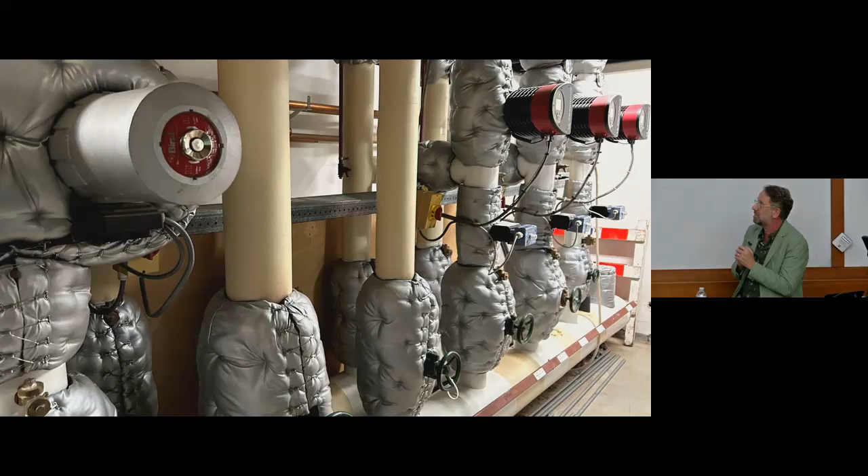So I bring up that contrast just briefly in what seems like perhaps a kind of self-defeating way, but embodied energy is the bulk of the carbon emitted through the building industry today. And we can have a discussion. I'd be happy to get into details after the lecture about how we can imagine shifts in the embodied content. I'm mostly going to talk about operational energy, right?

And so one of the themes here is that in principle, one could decarbonize the electricity grid so that we could run the lights and the escalators and the air conditioning machines off decarbonized energy. I mean, soon maybe, right? So one of the arguments here is that we really should save in the embodied energy because we can save in the operational energy later. Does everybody get that? Yeah? So that's kind of where we should focus our time, right?

So I'm saying that, but I'm also not doing that. I'm focusing my time elsewhere, in part because I don't really think the grid will be decarbonized, but I just want to bring that whole discussion out into the open as a way to get us in the zone of thinking about energy systems and buildings and how they operate, right?

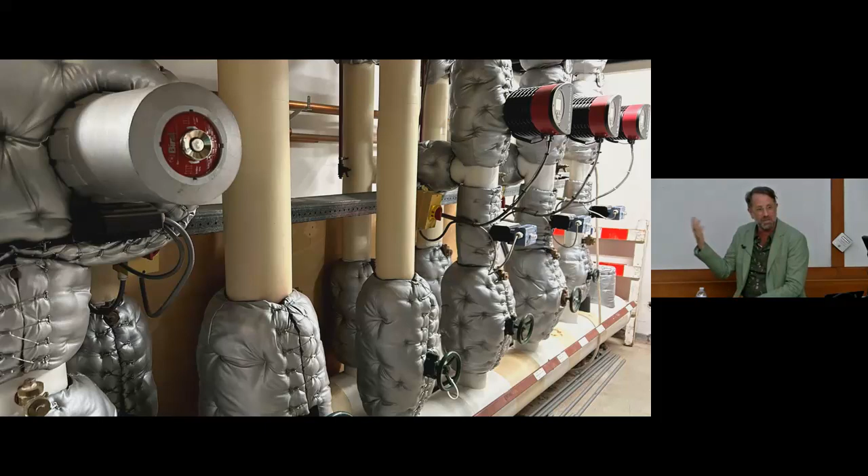What we're seeing here is a sort of typical heating and cooling system, let's say. This one happens to be at the Nieuwe Instituut in Rotterdam in the Netherlands. We all know that these kind of machines are hidden behind the walls or in the basements or on the rooftops, right? We all know that these internal systems are there to allow us to breathe and to allow us to feel comfortable in this space.

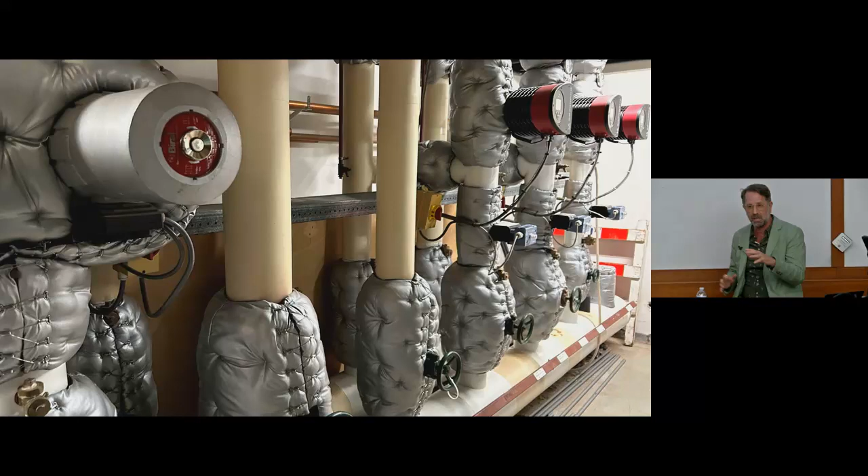Is everybody feeling relatively comfortable? Yeah? Okay. I'm wearing the universal suit, so I'm a little hot. But if people want to make themselves uncomfortable for a second, lean, and so there you go. Just see how, there you go, that's a good one. Just see how long you can hold it until you're like, this is uncomfortable. We're just going to leave you there.

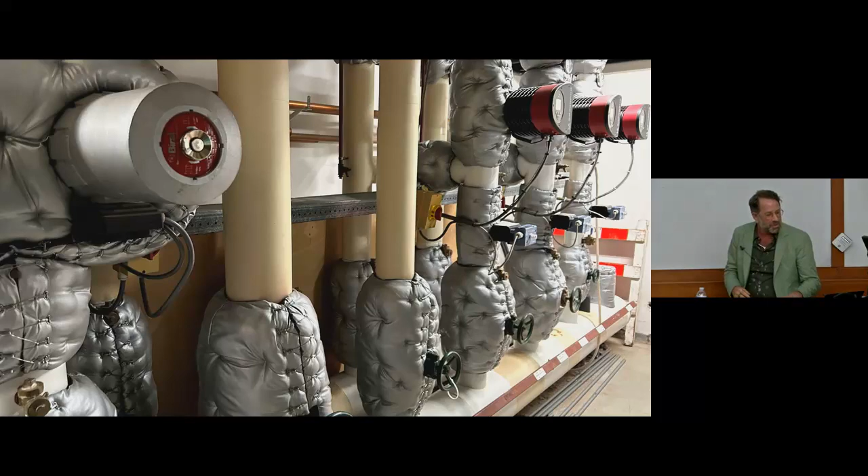There has always been comfort in the world, reckless comfort, we could say. Comfort based on someone else's continuous labor, right? So there's immediately, you can stop now if you want. Sorry, I was trying to feel bad for the guy.

There's immediately an equity piece here, right? It's not quite a zero-sum game, but we are comfortable by virtue of the fuel running through the system that we're effectively inhabiting. That has costs, right? And those costs tend to be paid by someone else. And we'll get into that in a second. But this question of comfort being based on someone else's continuous labors, right?

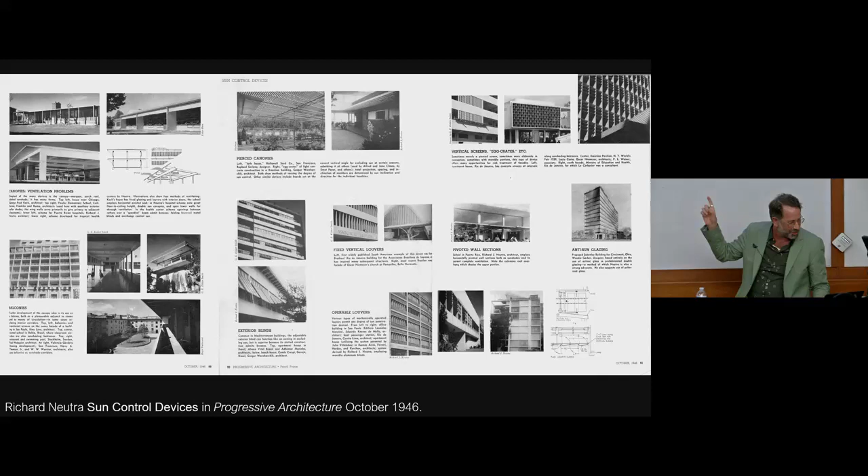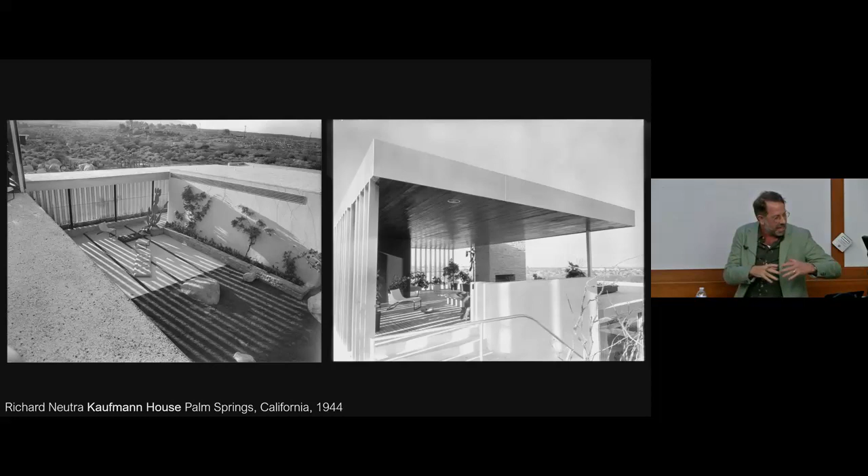So this is Neutra's Kaufmann House in Palm Springs, one of the better known. Again, thinking about comfort and equity, and this kind of delicacy that he's playing out here of these indoor and outdoor spaces. Here's some schools that Neutra designed, what he referred to as open-air schools, where this entire wall would go up like an old garage door.

And the students could sit outside, expanding the spatial dimensions of the classroom while also adding a significant climatic element, cooling the space off, assuming the day was more or less manageable. Neutra, I'm just playing out this narrative for a second to think about these questions of control and equity, climate control and equity. Neutra was

hired by the American government, at that time the Protectorate of Puerto Rico in the mid-1940s, to design some buildings for this site, some schools and houses and urban centers, designed in a very particular way for a relatively infrastructure-challenged geography. Not a lot of electrical wires, not a lot of utilities spread throughout the island, but a lot of need for comfort, for shelter, for the provision of amenities and services.

So Neutra started to devise this principle of modernism, and we won't get into all the nuances, that was less about a functionalism and more about what he referred to as an operationalism. So how can we operate as architects in such a way as to serve the common good with our interventions, with our designs?

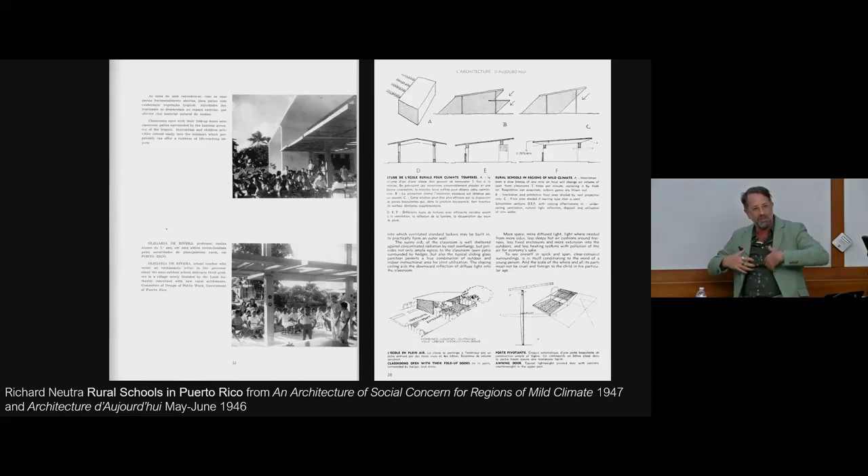One of the things you can see already is that he's looking at not only the angle of the roof, but this capacity for an air pass-through element to allow for ventilation, even the capturing of some of the rainwater, through the way the roof is designed and organized. We see again in these rural schools the capacity for them to open up onto this shared parkway, a ventilated condition that allows the building to not require the HVAC system. So bringing it back to that premise.

So again, it's just one little first taste. We'll get a few more to kind of think about how the architecture that we have come to accustom ourselves to, that we have been conditioned to spaces such as this, and it's kind of a great exemplar space of a room that probably couldn't exist were it not adequately conditioned. There's not a lot of obvious opportunities for natural ventilation.

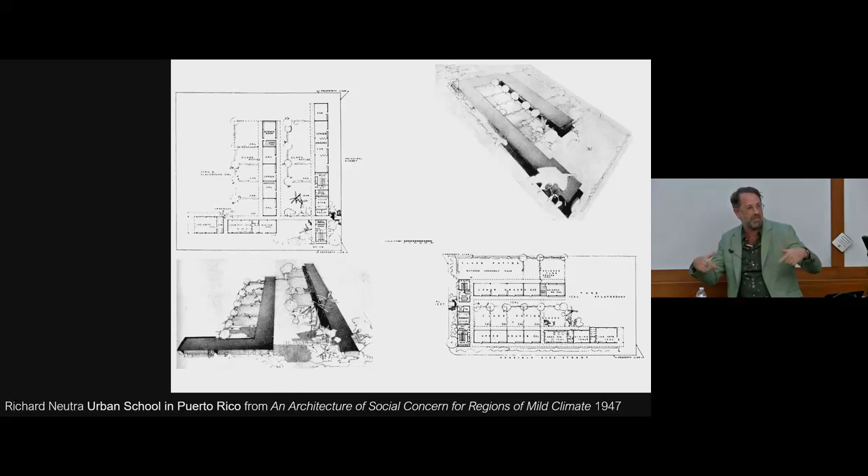We're in effect kind of stuck in here, right, to have this discussion, and we couldn't be here without the HVAC system as a kind of life support system, right? So in that kind of basic sense, we are breathing petroleum, right? We are kind of digesting it through our lungs and often in things that we touch and things that we eat and things that we wear. But we're engaged in this kind of cycle of petroleum extraction, distribution, and sort of dissemination into fuel tanks.

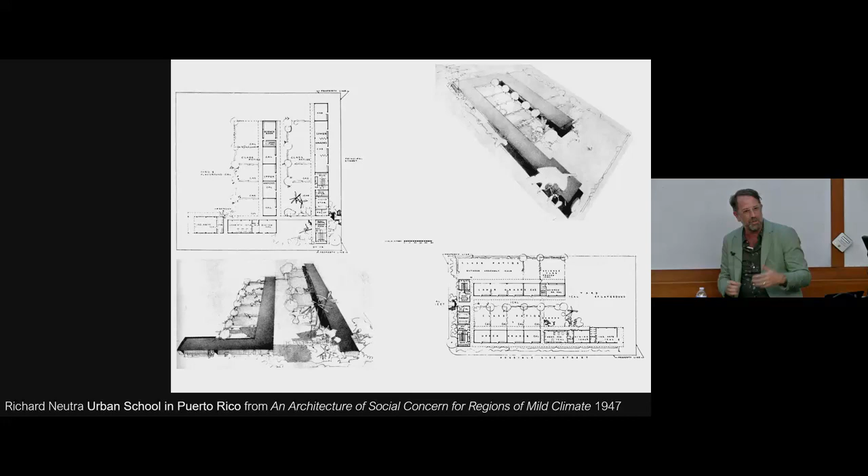I mean, maybe we're even on steam heat here actually. So I might have to change the argument a little bit. But we're reliant upon a system that comes out of a fossil fueled system in order to kind of exist in this space. And I'm just going to show a few slides as I'm talking through some of this.

Part of what I want us to think about is the extent to which, historically, over the period circa 1920 to circa 2020, that's a very optimistic kind of century of petroleum profligacy. And I like to say profligacy because you could do this easier pre-COVID. You kind of spit it out when you say profligacy, right? And we've just sort of spewed oil around the world and lived off it and kind of surfed the waves, right?

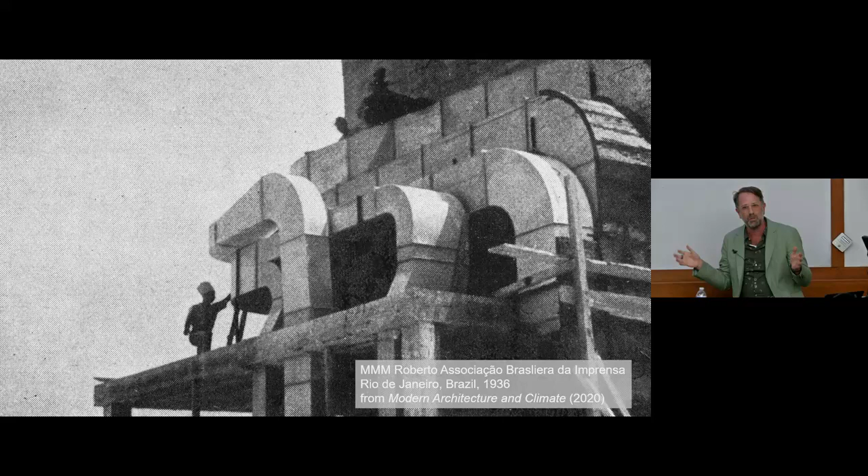This century of fossil fuel profligacy, in effect, can be bracketed off, right? And we can kind of understand what was happening before fossil fuels, or at least at the beginning of it, as a means to kind of think about what happens next. Okay.

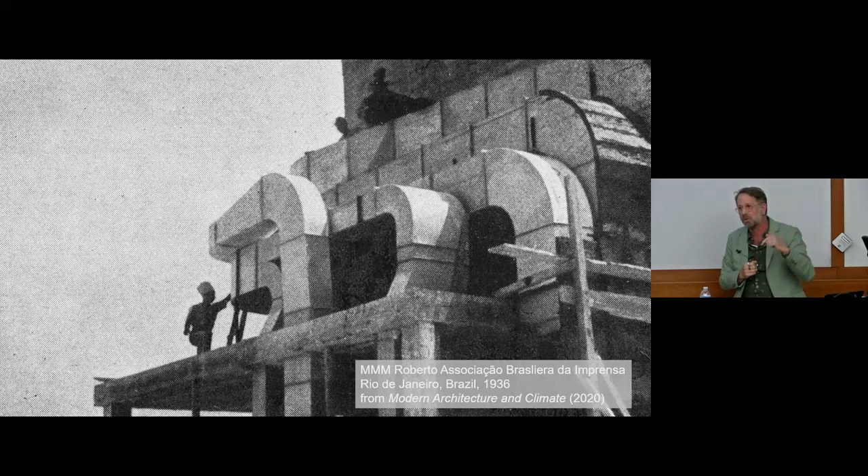I'll add one other little piece before I go on in this kind of hopefully effectively scattered preamble. Neutra's work in Puerto Rico was also really interesting because it was in relationship to a set of economic theories, right, that we would today call degrowth. But at the time were not called, and when I say that, you're supposed to go, degrowth. No, okay. At the time it was referred to as a horizontal economy, right?

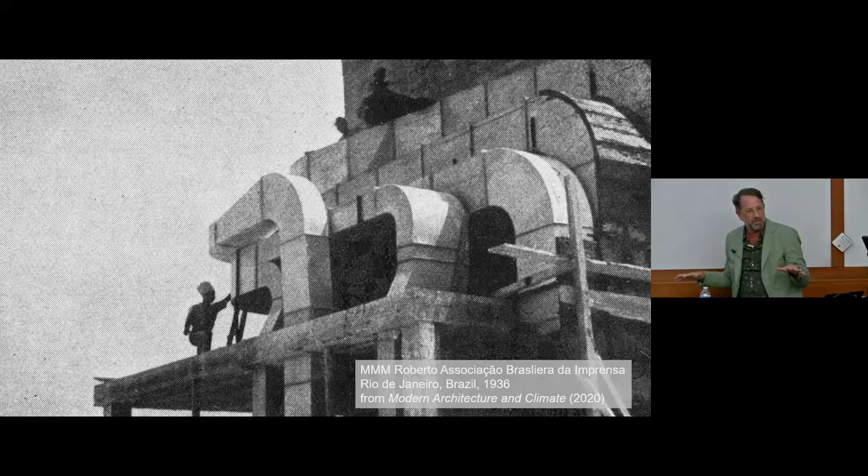Which is to say, why not take an island such as Puerto Rico and, rather than provide a kind of paternalistic relationship to the United States mainland, provide the island with resources and utilities and materials such that it can be in effect self-sustaining, right? Allow for the economic expansion of the island to be distributed across the island rather than kind of going upwards towards mostly urban design consultants from Harvard, right?

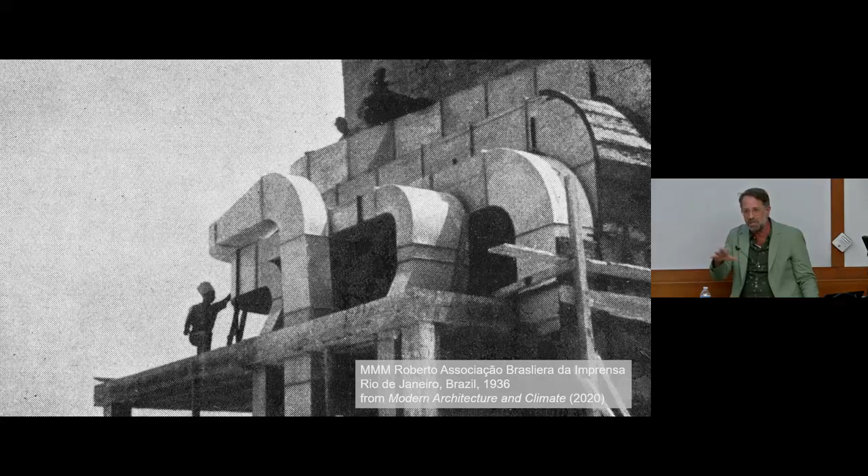How can we sort of reimagine the relationship of that economy so that it has that kind of horizontal reach, right, rather than a vertical sort of going up, right? So it's to say that these kind of architectural interventions were also about a kind of different relationship to the costs and benefits of economic growth, right, and to understanding the relationship between economic growth and the kind of territories which it inhabited and which it often extracts from.

Okay, shifting gears to a sort of part two or kind of 1.5 here, right? Again, still kind of getting us all on board and on the same page, and I certainly welcome questions throughout the discussion. I want to sort of bring us up to speed, if you will, relative to this question of carbon and comfort and buildings as really just a medium to kind of draw fuels out of the soil, right?

Draw fuels out from underground and sort of process them and then emit carbon into the atmosphere. Right? That's in effect what the 20th century has wrought, right? A sort of cultural medium through which we can process fossil fuels. So I want to kind of give us, not super updated, this report is now almost exactly 2 years old, but it says some important things about buildings that help us to sort of get on board.

This is a report from the Intergovernmental Panel on Climate Change, I assume a body known to many here. Hopefully you have read the report. It's a bit annoying to read, but you kind of get the general idea. Maybe you've heard about the COP conferences, et cetera.

This entire report is on the mitigation of climate change, and the two approaches to climate change are adaptation and mitigation, right? Like adjust and expand the wetland so that you can manage the hurricanes. That's adaptation. Mitigation is reduce the amount of carbon we emit so that it doesn't get worse. We're mitigating the problem. We're trying to make it a little bit better. So this report was in many chapters, a couple hundred pages, various forms of mitigation.

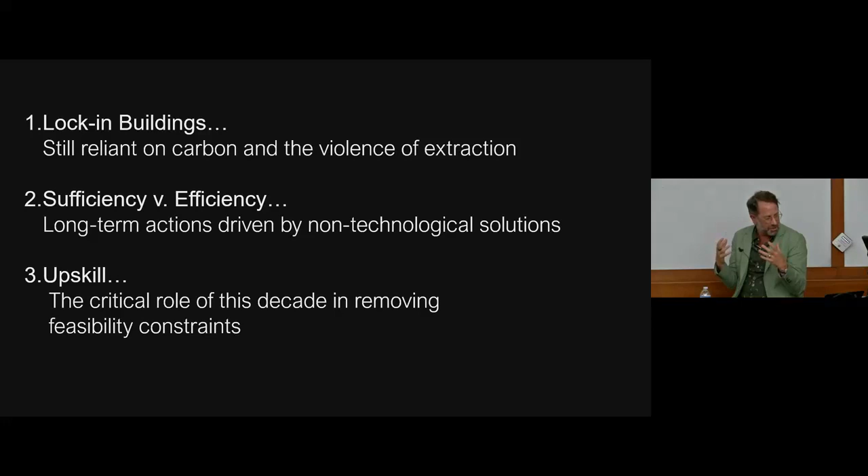We want to look at the details of how architects can be most effectively involved. But this broad question of banging our head against the wall in frustration that we're involved in a professional operation that is damaging to the planet, and we're struggling to find ways out of that.

So what is this locking in, right? It's not just locking in the kind of shell companies that own half of these apartments and the economic inequities across New York City, but the broader sort of global inequities that relate to fossil fuel distribution, and of course the kind of equity of comfort as well.

Okay, second principle, sufficiency versus efficiency. Sustainable architecture, such as we've come to understand it, green architecture, and I'm running late here already, so I have to do this quickly, so you'll forgive me if I tread on anybody's toes. Green architecture, sustainable architecture, has relied on the principle of efficiency, right? We're going to provide exactly the same product. Any building that's green looks more or less exactly the same as the one next to it that was built in 1980. Whatever, it's got a lot of floors. You can use it as an office space. You can use it for your hotel, right? We're providing the same service, but we're doing so with marginally less energy. We're making it a bit more efficient.

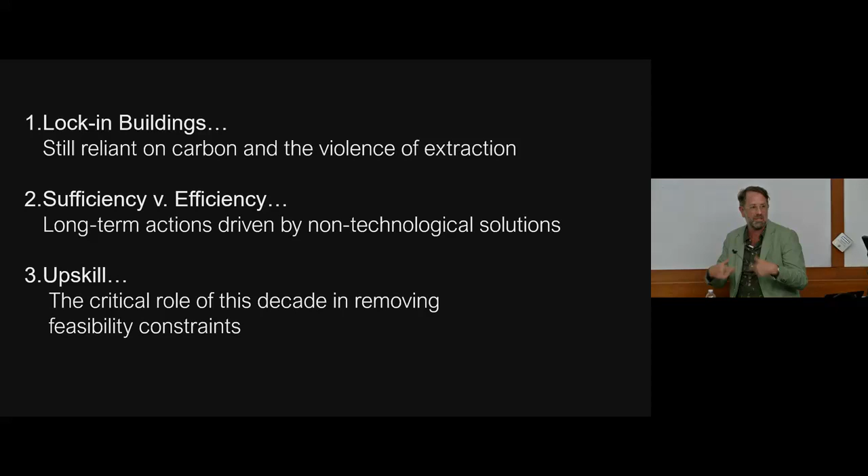So this question of upskilling is really just to suggest that this is the decade, right? This is the period, the time is now, to consider as students and as pedagogues how we change, reimagine the contours of the field according to this transformation that we know is going on, but still aren't quite sure how big it's going to be or how we really get ahead of the game here, right? So part of this is just to stay aware of that flow of knowledge and that transformation of professional tools and capacities, and keep oneself abreast of those changes.

One of the thoughts that came up in my head was looking towards biomimicry, and these structures that can be radically different to structures we know now. Right. To the kind of common programs we're seeing. Yeah, it's a tricky one, right? I think biomimicry has many components to it, and I could imagine a lot of ways, in general terms, of learning from the natural world to understand modes of sufficient construction and modes of habitation.

I think the danger bell that goes off in my mind is that biomimicry, as some of you may know, is often about structural efficiency, right, which can be great, but still the efficiency is in there, right? And a lot of times this question of efficiency versus sufficiency comes up. Should we take down this building and put up a fancy LEED 5-star tower? Or should we let the building survive as it is, but adjust it and retrofit it and give it some better systems and make it work a bit differently, right?

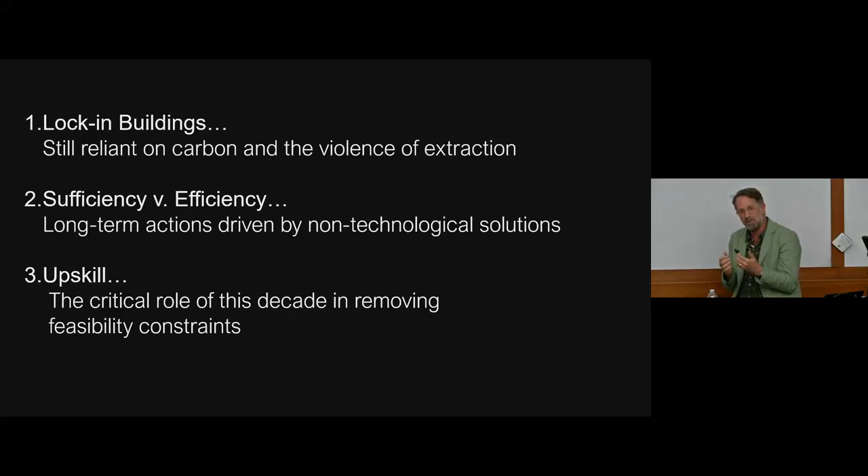The efficient 5-star LEED tower is still going to require so much embodied energy that if you bring that aspect into your analysis, generally speaking, retrofit, I'm being far too schematic, right? But in that ideal scenario, retrofit would win out on carbon terms. So I think you'd always want to be wondering, with this biomimetic approach, what's the difference between doing this and dealing with the existing building and maybe even using these same skills and tools and design approaches to reimagine that building, right? So, speaking very generally.

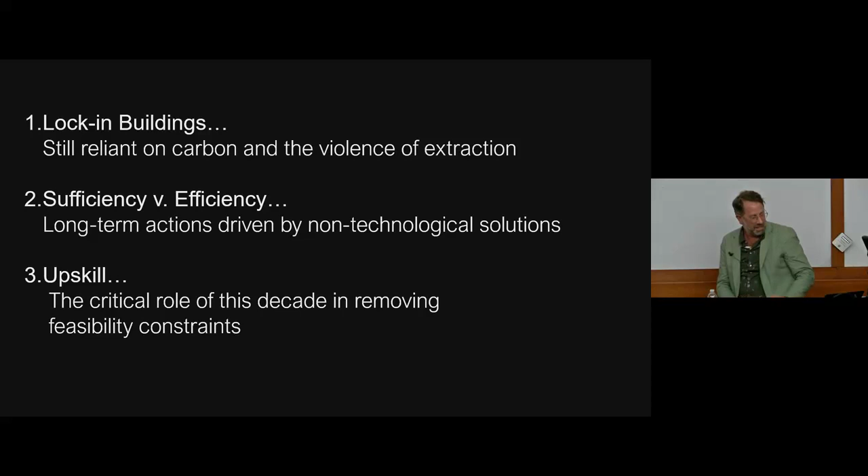Okay, so I think we're at part 3 now. This is a comparative analysis of these two buildings to help us get a sense of this general premise that I put on the table of this bracketed century of fossil fuel profligacy, of petroleum profligacy, and how by looking at its early days, we can begin to imagine its end times as well.

Not our end times, right? It's not the end of us, it's just the end of fossil fuels. That's an important thing to keep in mind, that we're not really talking about the end of the world. We're talking about the beginning of a different world. We're talking about a transformation of the way that we relate to our natural environment and the Earth systems that we inhabit. People will suffer, right?

Millions and millions of people will suffer, but it's not an apocalyptic event in the classic sense. So, sorry, just to jump back from that, I don't know how these things come out. To look at these two buildings for a second.

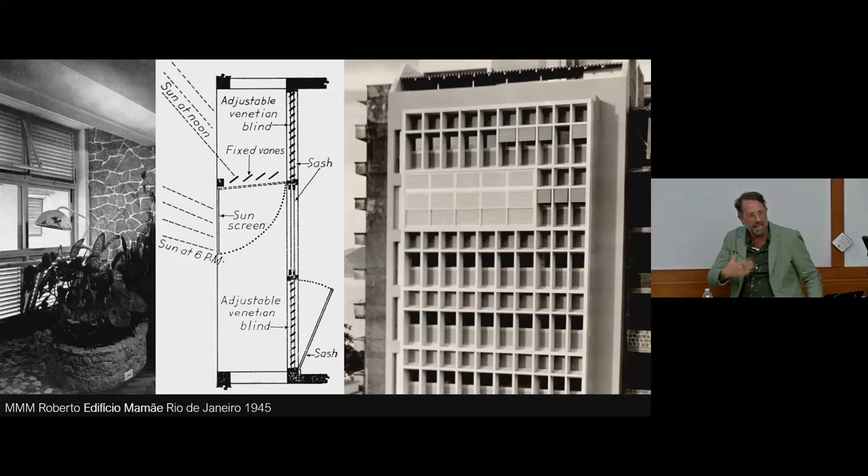There's none of this turning dials, or pressing screens, or using our phone or watches even. There's a much more physically engaged, embodied system. I'm not going to get too much into that, but there's a sense that your body is affected by the climate, and it's also the mechanism by which you can adjust or adapt the climate. In here, in a very simple way, this kind of promotional shot, right?

And it's also interesting to note that the architects would sort of take a photograph of themselves for magazines, moving this shading system around, right? This was their kind of calling card. This was how they got to be known. I just love this one.

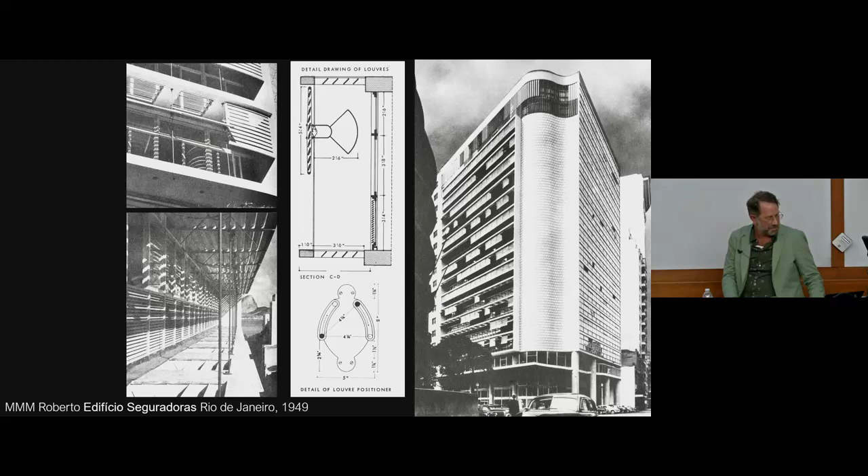So many different ways, again, of moving the shades and different operating systems that can help you to adjust the climate, adjust the light on different terms as the day goes on. Lots of different, kind of explosion of interest and creativity around shading systems in Brazil in the 40s and 50s. A real moment where a lot of interesting things happened, right? A lot of different mechanisms were tried out, experiments were made. Most of these, we should note, were in asbestos, right? So, oops, right? But nonetheless, a lot of great ideas being played out.

And much of that was true in a very complicated way. But it's nonetheless to say that this premise of a shaded interior was also part of this sense of a new world, a new kind of modernity that was being entered into. Okay.

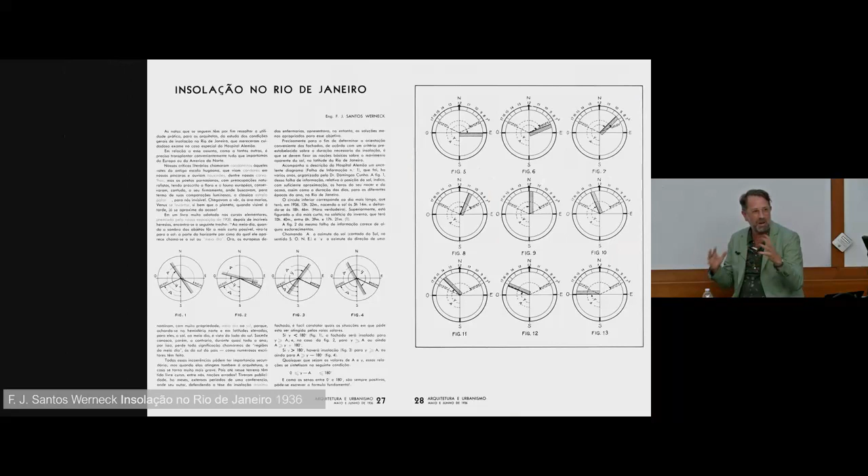And I'll get to this slide in a second, but I don't know if any of you have been following it very closely, but the geologists just decided that we are not in the Anthropocene, right? Is this on your radar? So I'm assuming the Anthropocene is a concept that's on your radar, right? The age of human transformation of the world. It was a complicated decision as to why they decided we are not in the Anthropocene. But the main point, at least the one I'm going to focus on, was that it's not all of humanity.

Right, the burning of fossil fuels and the transformation of the atmosphere, and the geologists are worried about the sedimentary layer, and how basically the carbon that we pollute into the air will eventually become sediment, and over millions of years, I suppose, will be visible in the strata. Some time in the future, when a rock face falls off because of erosion, you'll be able to see the layers that change because of the use of carbon. The geologists were clear that was in fact going to happen, but it's not anthropogenic in the sense of a species condition, right? Some people are doing it and some are not.

And we, if I can be so bold as to put us in the collective of those in the global north that have been comfortable with, accustomed to using fossil fuels as if there were just plenty and we didn't have to worry about it, right? Maybe slightly adjusted over the past few decades, but generally speaking. So it's in part to say that when we're talking about this premise of comfort, we're talking about the calculations and estimations for a very specific swath of the global population, right?

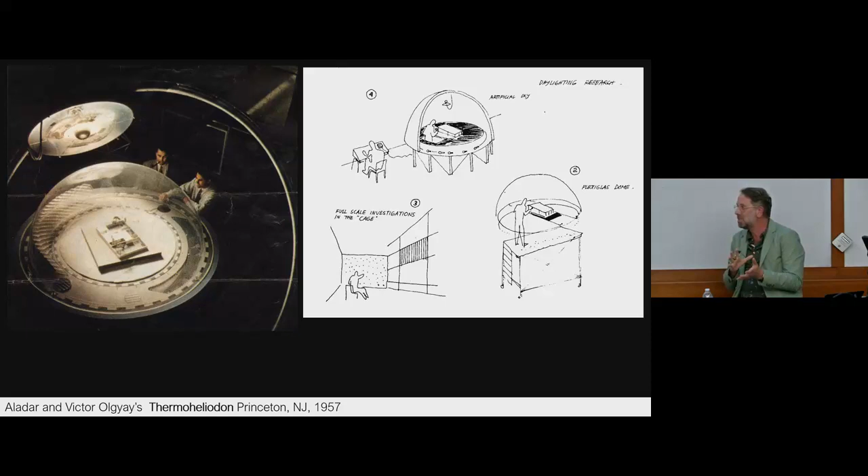Well, the history of air conditioning more specifically really begins in 1911, Yale University, where the Carrier company, which became Carrier Air Conditioners, performed a bunch of tests on 18-year-old Yale male undergrads without their shirts on, right? Sounds kind of fun.

Again, I'm not going to get too far into these kind of histories, but what we're looking at in these past two slides is the kind of moment when theories around climate and comfort began to be theorized and sort of scientificated, if you'll forgive the term, in architecture, and started to enter into the design discussion a bit more directly, kind of how do you feel in your room, in your space that you're creating. And so this concept of the comfort zone, initially developed by these architects, Olgyay and Olgyay, and then taken really quite aggressively by ASHRAE, the American Society of Heating, Refrigerating, and Air-Conditioning Engineers, that has set comfort standards ever since.

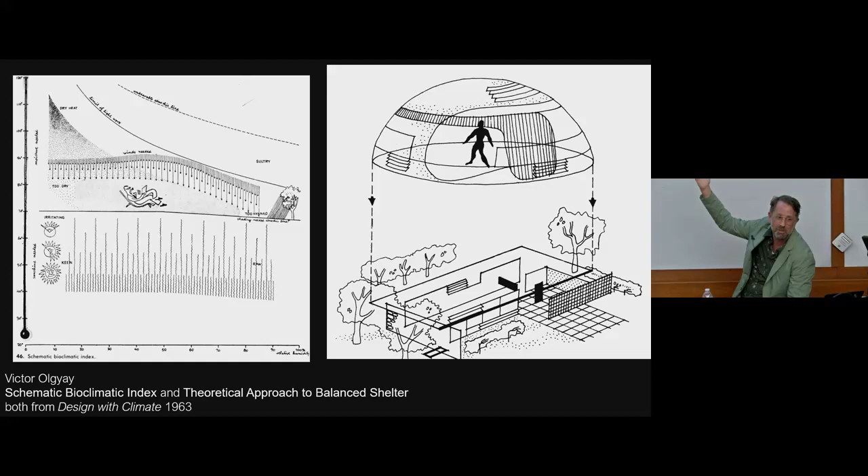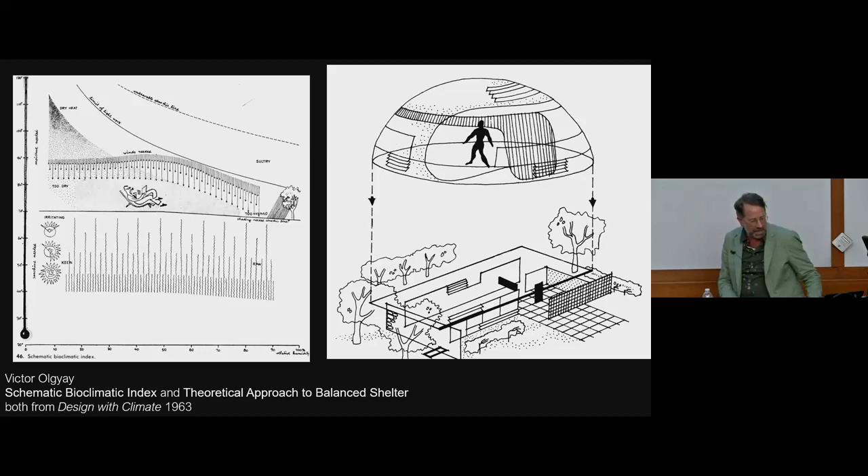So part of what we want to keep in mind is that this sort of premise of the we is really about, in effect, a premise of climate and carbon reparations, right? That if I'm suggesting, as I suggested at the beginning, that we all need to learn to be less comfortable, I'm talking about those of us who have, let's just say, the privilege to be at a university. And I don't want to make any assumptions about other aspects of your life, but I know that about you. So at least during your time in school, you have access to air conditioning.

You have some relationship to the kind of stable atmospheric interior condition that we're accustomed to that optimizes our labor, that allows us to be healthy, that generally speaking is pretty good air quality, et cetera, right? We have this capacity to be comfortable, and there's others that might be down the street or around the globe that are suffering in these same conditions, right? And we can say this very explicitly.

It's a bit too spread out here to maybe feel it sensibly, but we had that building in Hong Kong up a minute ago. Air conditioning doesn't actually cool the air, it just moves the heat, right? I'm sure many of you know this. So as you displace air outside, in most cases that waste heat goes up high, above the building. In some cases it does not. One of the legacies of 60s and 70s modernism in Hong Kong is a lot of the waste heat goes onto the street in an already very hot and humid environment, right?

So there are days when there's heat alerts that are not because of the sensible heat, the temperature climatology, but because of the intensity of waste heat by virtue of the high running of the air conditioners, combined with the heat and humidity, et cetera. So it's to say, back to Neutra's notion, that every time we are feeling comfortable, someone is feeling less comfortable, right?

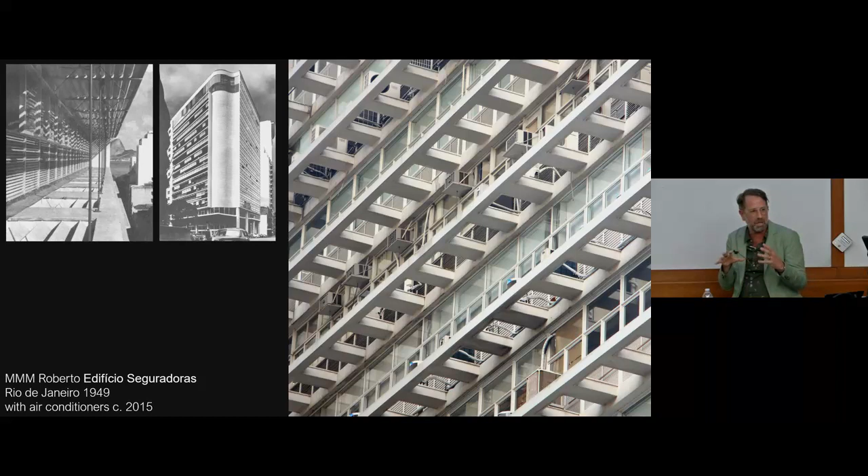It's important to note that the temperature differential, the relative thermal comfort that these shading systems provided, is nothing compared to air conditioning. The power of fossil fuels overwhelms the capacity for shading to have an impact on the interior. There's really no contest.

And part of what's at stake is that you might often hear that we're never going to have enough renewable energy to meet our current fossil fuel use. And that's absolutely true. We will never have enough renewable energy capacity to use the same amount of energy that we're using today by virtue of fossil fuels. So we'll be both increasing the amount of renewable energy available and also reducing our demand. This is back to the sufficiency principle.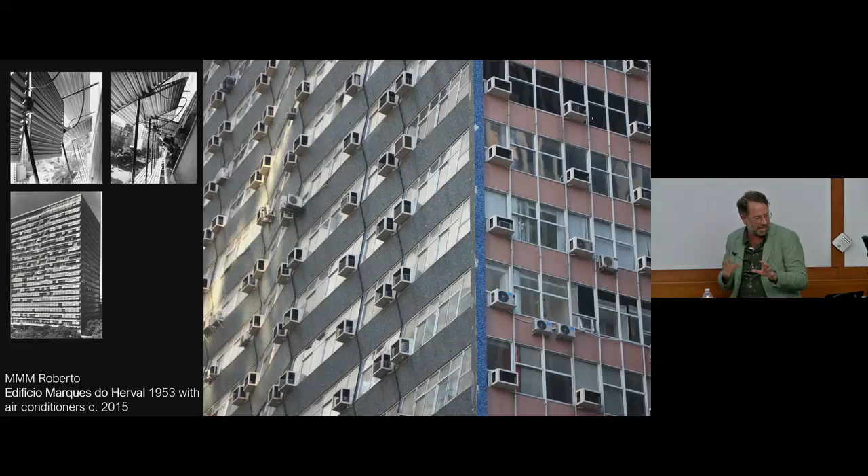So part of what I think these last slides help us to understand is that at stake in designing a building is what I like to think of as a set of thermal practices. There's the thermal practices of the architect, all of us, and our capacity to be agents of decarbonization that set up a system that might integrate the user in a certain way. I'll just jump to this slide since I did the little dance bit on here. A set of interventions that allow for somebody to use the space in a specific way. So it's both the practice of design and the practice of occupation that need to get brought into account in order to understand that nexus.

Practices of occupation or practices of inhabitation, as I've been calling them, really are the same thing as comfort. So what I want to leave you with, as a potential denouement or at least an opening for questions, is how we recognize that comfort is not a universal state, an endless condition of thermal pleasure that we want to open the door and inhabit at all times. But it's rather a set of practices, a set of interactions, a set of ways of being within a space that we can change, alter, disrupt, and reimagine as we move forward. I think I'll stop there. I've got other things here, but yeah, please, go ahead.

How, as an architect or a designer, can you create this kind of uncomfortable... Right. Well, kind of any means necessary. I think there's two answers. One is make sure the person using the space knows that they're using less carbon, have a little thing on the wall, or their watch beeps or whatever, make it really almost a performance of using less carbon, because that trains us to be excited by that. The other version is, completely hide it. Maybe you won't know the difference.

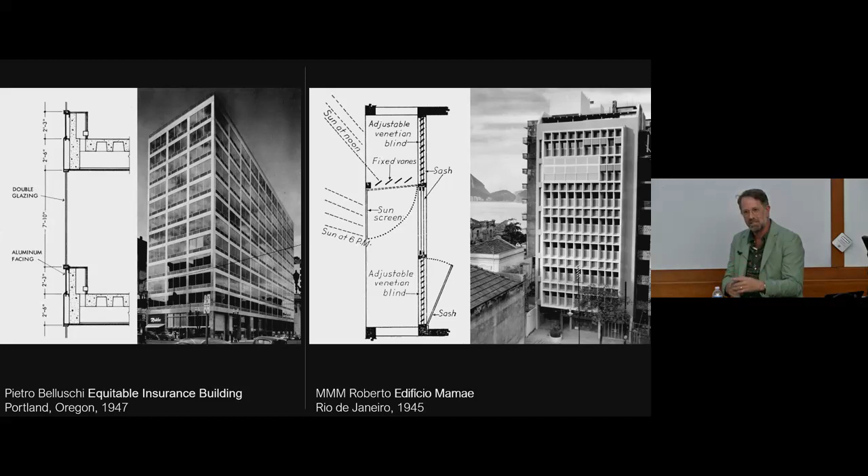So this becomes, again, a sort of activist advocacy political set of discussions that says, we want to encourage sufficiency, but we want to minimize the taking away of rights in the process. And a lot of the people that study this stuff suggest, and this is a frequent framework, that it'll happen when it has to. That we'll live in smaller quarters and in closer context and in a different sort of community when we're forced to, rather than when we select to and opt to. And so part of that sufficiency side of the equation starts to be about enacting desires that have these future people in mind, perhaps even more than the contemporary people, which is a difficult externality to bring into our decision-making process.

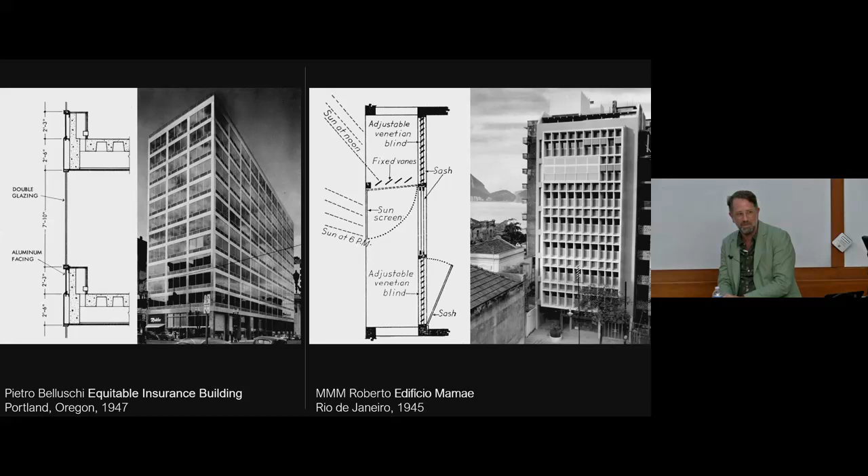How'd that go? Yeah? Okay, I got one thumbs up. That's all I need. It'll get me through dinner.